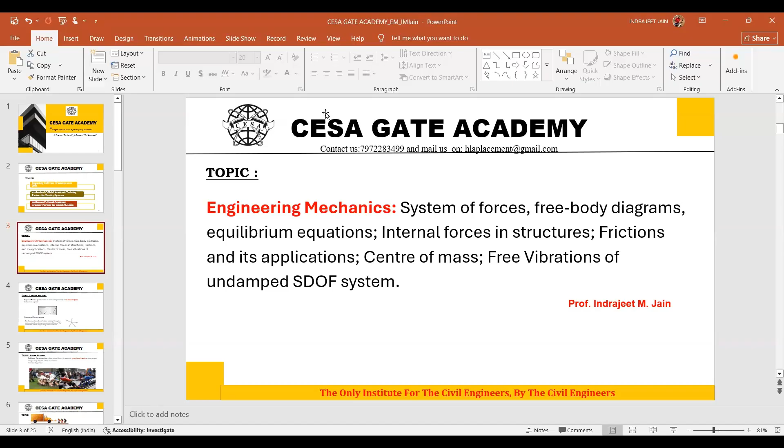This is the syllabus designed by GATE. To achieve this, the engineering mechanics part carries very less marks, hardly 2 or 4 marks questions. But engineering mechanics is the base to all the subjects which come under the head of structures.

System of forces, as we learned in our first year engineering mechanics, force is an agent which changes the state of the body from rest to motion. In civil engineering, all forces we consider are acting on a rest body. When a single force acts on the body, we call it a force. When there is more than one force, then it is a system.

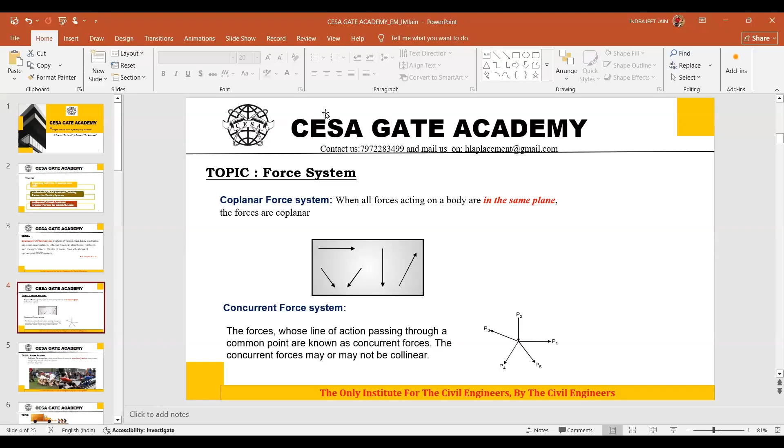There are different types of systems. On screen you can see the force system: coplanar force system, concurrent force system, collinear force system, parallel force system. The name itself indicates that when forces lie in the same plane, it's coplanar. Forces acting on the same point is concurrent, and forces acting in the same line of action is collinear force system.

These are the various force systems, and the effect of the force system on structures differs, and based on that we have to apply different formulas.

After that, we will learn equilibrium. Equilibrium is nothing but a set of forces which keeps the body at rest. As we have limited time, I'm not going to explain much more theory, since you already completed your graduation or are in the third year or final year of your engineering.

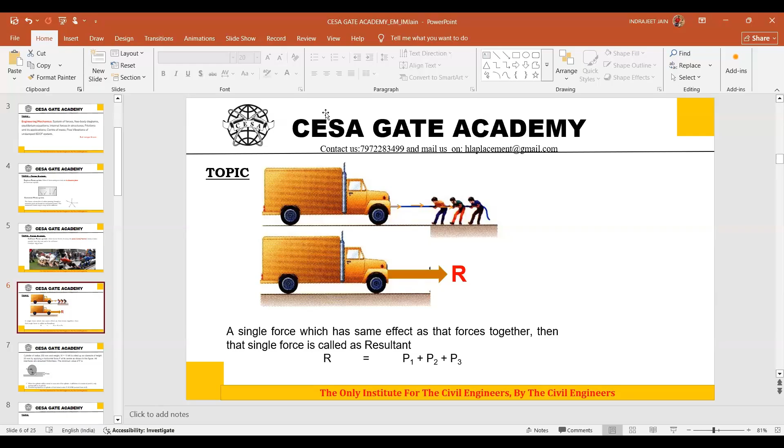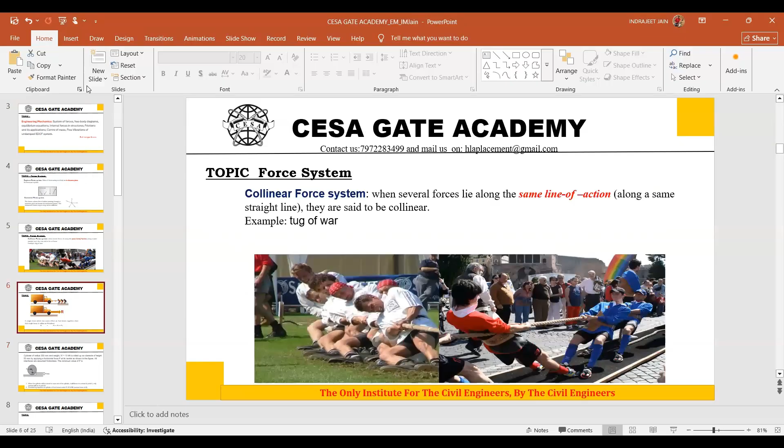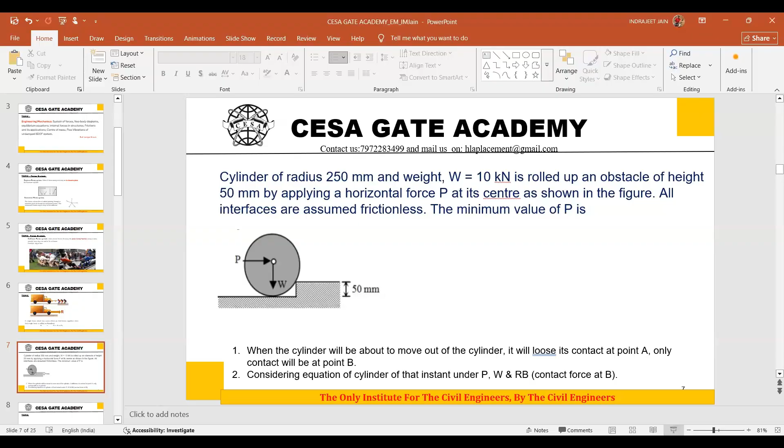Just a minute. Just a moment. Yeah.

In this particular figure, you can see there is a weight. Just look at this figure: there is a cylinder having weight W, and this cylinder we have to raise over this step whose height is 50 mm.

The cylinder radius is given as 250 mm. The weight of the block is given as 10 kilonewton, and the height of this step is given as 50 mm. The force given is a horizontal force P.

So everything is given over here, and this cylinder will move on this particular corner of the step. Like this, the contact between this floor and the cylinder will be reduced.

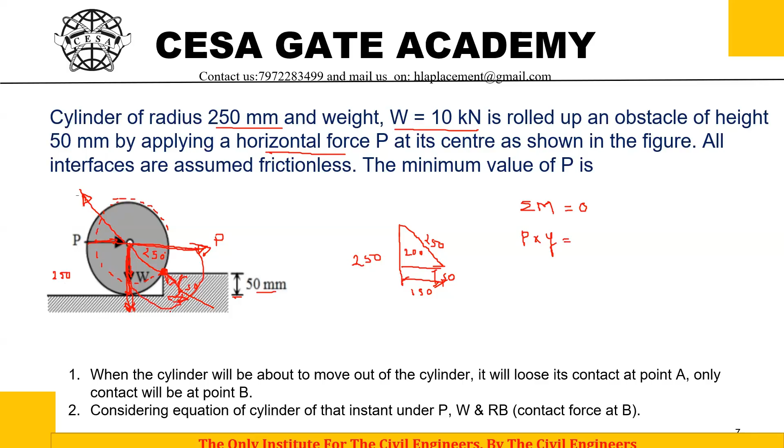If you take the moment of these two forces about that corner equal to 0, so P into the vertical distance Y, which will be clockwise, and this force will be anti-clockwise, W into horizontal distance X.

Now see here, P you have to calculate. Y value is known to us, that is P into Y. So P is the horizontal force and vertical distance is now 200 mm. This distance is vertical, this is 200 mm, and weight is given in your numerical, that is 10.

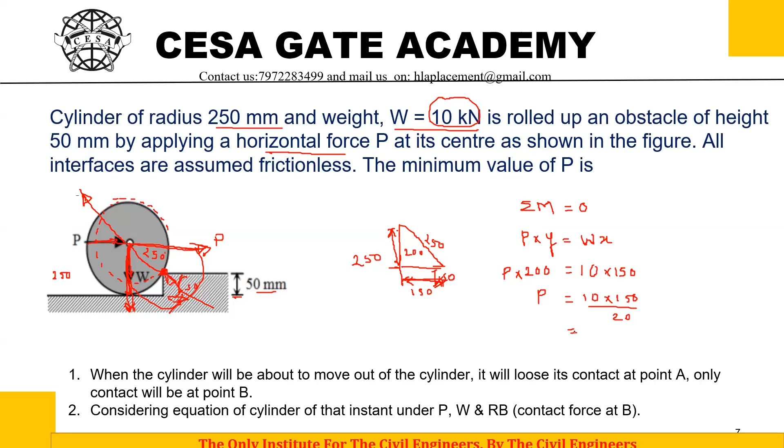And the value of X by Pythagoras theorem will get 150. I'm not going to solve the Pythagoras theorem here because it's just an introductory lecture, but by Pythagoras theorem you will get that, and from this you will get the value of P. It's very simple to solve such a numerical. Like this, it's 3 by 4, that is 10 into 150 upon 200, you will get the answer. Like this we have to solve the numerical. So in a very simple, short and conceptual way to solve the numerical, there is no need to go for the rigorous method.

So this basic concept must be known to us: hinge support has two reactions, that is horizontal and vertical. And roller has one reaction, that is always perpendicular to the support, one reaction.

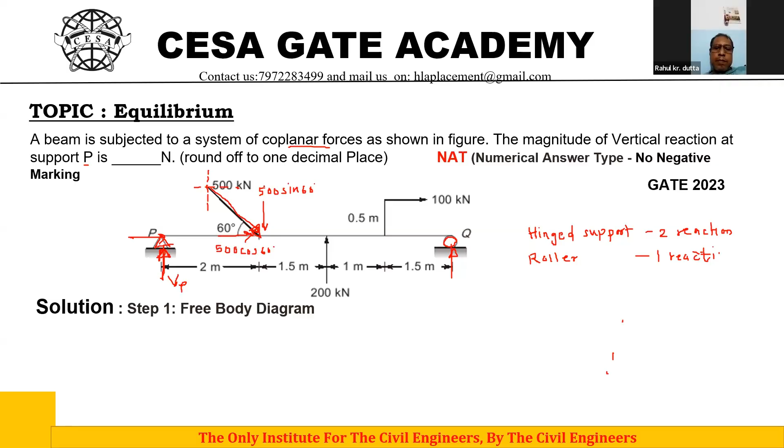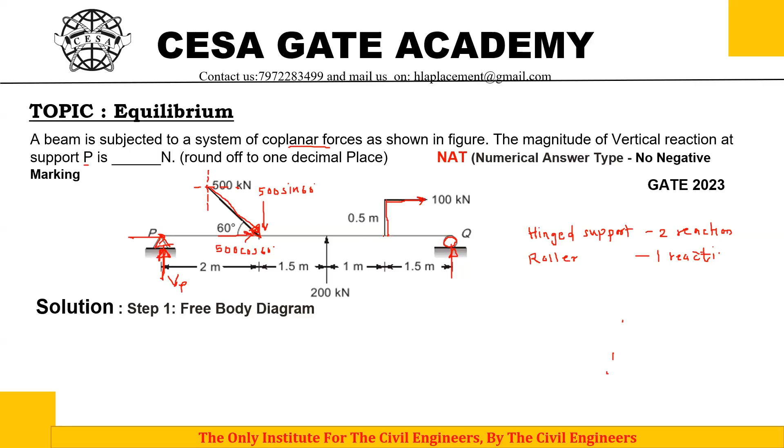Then after this, see here there is a force on a bracket. This is a bracket, and on which there is a horizontal force. So the equivalent of this horizontal force will be, we have to apply the same force here, that is 100 kN, and also produce a couple. So here this force is converted. Meaning if I draw here the bracket with horizontal force, this will be equivalent to the horizontal force and a couple acting at that point, and the couple will depend on the horizontal force and its perpendicular distance.

So in the next figure, I had drawn the FBD. You can see the FBD. Here there is a horizontal force, that is 500 cos 60.

Then the couple is converted, that bracket force is converted into horizontal force, and a moment is 100 into 0.5. That's it, this much only the conversion in this particular numerical.

And then we apply the condition of equilibrium. There are three conditions of equilibrium: summation of fx is equal to 0, summation of fy is equal to 0, and summation of moment is equal to 0. So as we want to find out this particular reaction in our GATE examination numerical.

So what we will do, we will take moment on this support, so in a single step we'll get the answer. We are taking the summation of moment. This moment is 50 Newton meter, that we have taken directly without multiplying a distance. This is summation of moment, so clockwise is positive, so I have taken positive.

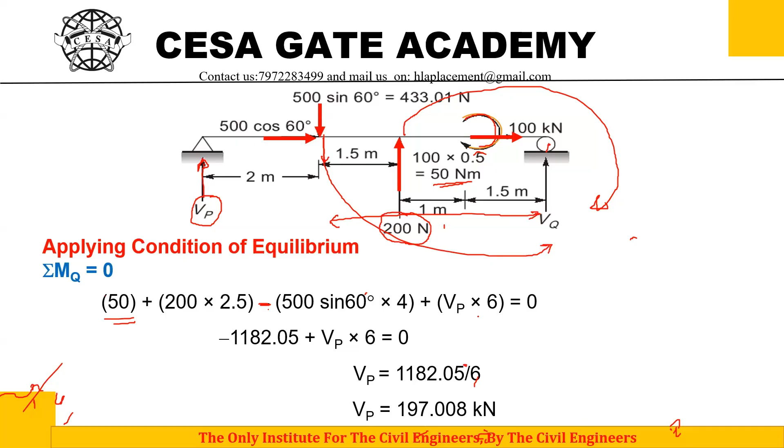And the distance with respect to Q is 4. Then after that, this next and last force Vp, which produces a clockwise moment with respect to Q. So Vp into 6. Solving this, we'll get the answer that is 197.

And if you go through the numerical, you can see that it's a numerical answer type question, no negative marking for such a question, and your answer is rounded up to 1 decimal place. This is a numerical from GATE 2023.

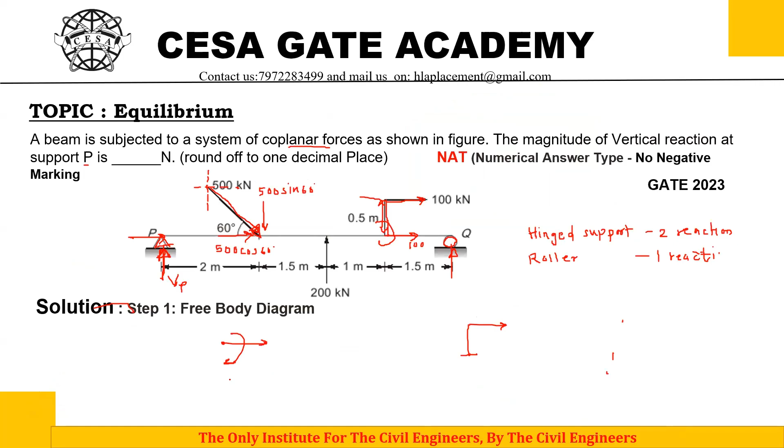So here we will not get any options, we have to solve this numerical and directly place the value. So here there is no option over there, you just have to enter this value, 197.0. Clear? So this is another type of the numerical.

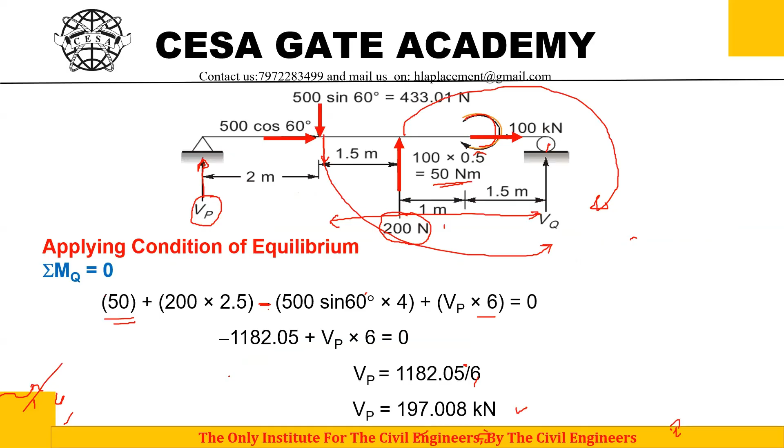So here the moment at the hinge is 0. So here there is a hinge and we'll break our beam into 2 parts and we take the moment about this one. So taking moment about the hinge, we consider the right part of this one, where the reaction RY is the vertical reaction.

Here is the fixed support having 3 reactions: horizontal reaction, vertical reaction, and a moment. But since there are no inclined forces or inclined support over there, the horizontal force will be 0. So only vertical reaction and a moment at the cantilever, that is the fixed support.

And at the roller support, there is only one reaction. So when we take the moment of these forces, RY into its perpendicular distance - this is your RY. RY into its perpendicular distance from the hinge is 2 meters, so this is your RY into 2.

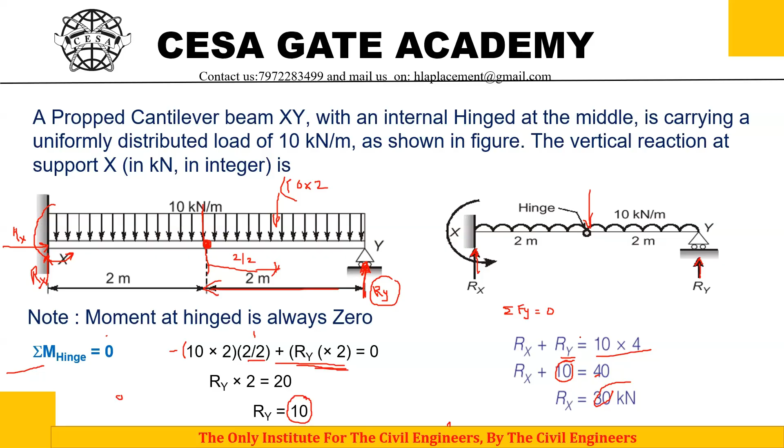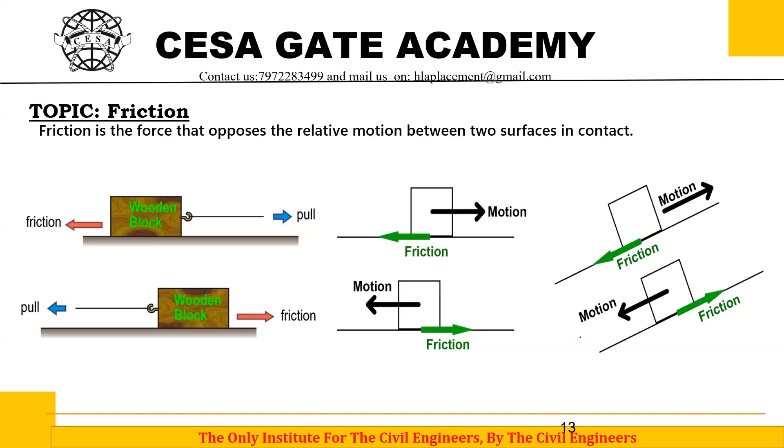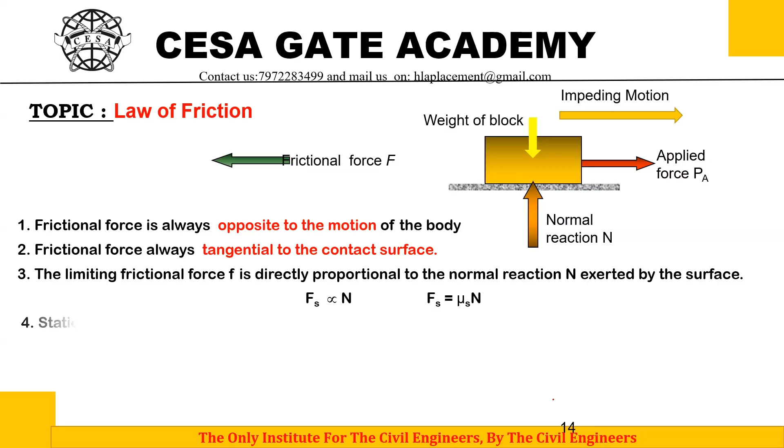Now, some laws of friction. First, as already explained, frictional force is always opposite to the motion of the body. Frictional force is always tangential to the contact surface. Limiting friction force is directly proportional to normal reaction, which is very useful for solving numericals on friction. Frictional force equals mu into N, where mu is the coefficient of friction. The coefficient of static friction is always greater than dynamic friction.

This is a numerical that was asked in the GATE examination, based on the friction concept. A horizontal force of P kilonewton is applied to a homogeneous body of weight 25 kilonewton, as shown in the figure. The coefficient of friction between the body and the floor is 0.3. Which of the following statements is correct?

In this exam, it's not necessary that there is always a single correct answer—MSQ means multiple answers could be correct. So let's select the multiple correct answers here. Let us see whether in this statement there is a single correct answer, two, three, or all four correct, by solving this numerical.

The horizontal force is applied at the top corner of this rectangular object, whose width is 1 meter and height is 2 meter.

The answer options are given: the motion of the body will occur by overturning; sliding of the body will never occur; no motion occurs for P less than 6 kilonewton; and the motion of the body will occur by sliding only. These are the four options.

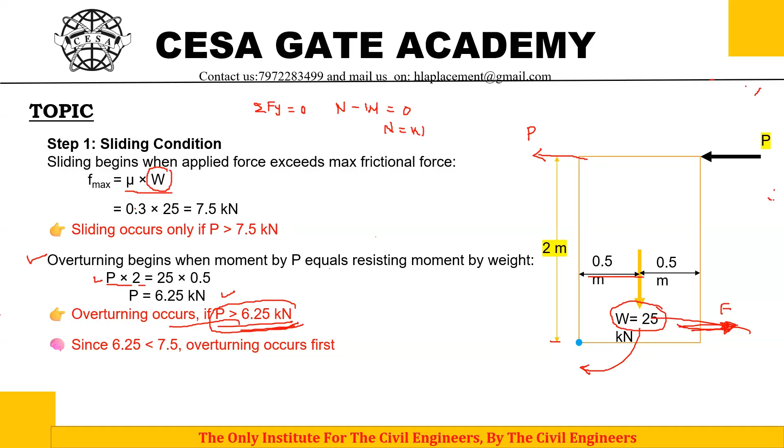From this we get the sliding force. Sliding will occur only when P is greater than 7.5 kilonewton. So which occurs earlier, sliding or overturning? Sliding occurs when force is greater than 7.5, whereas overturning occurs when force is greater than 6.25. So overturning occurs first, then sliding.

So looking at the options given: option A says the motion of the body will occur by overturning. Definitely the motion of the body will occur by overturning, because overturning occurs first. Sliding of the body will never occur.

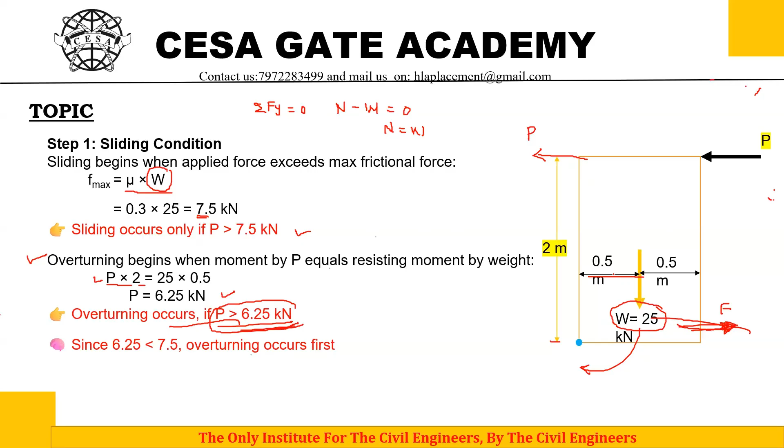No motion will occur if the value of P is less than 6.25 kilonewton. Why? Because our values are 6.25 for overturning and 7.5 for sliding. If P is less than that, no motion will occur and the system will be in equilibrium.

The last option says the motion of the body will occur by sliding only. This is incorrect because sliding will occur at the end, after overturning. So in this particular numerical, sliding will not occur. The correct options are A, B, C.

So we have seen the NAT numerical, the simple numerical, and the multiple choice question numerical. We have seen this particular numerical where three answers are correct. We have to deal with this properly and conceptually while attempting numericals in your GATE examination.

Never try to solve all the questions. Solve only those questions on which you have confidence. And that's why you require perfection in your subject.

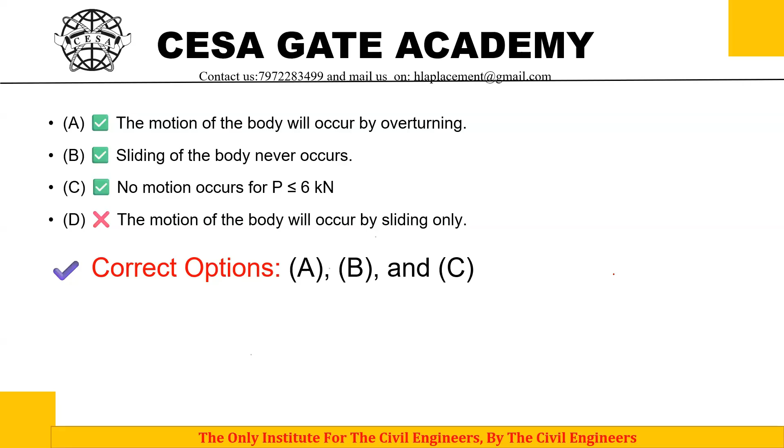There are some more topics, but I think other faculties are also waiting for their turn to present. I think we'll stop here and the further topic will be continued by the other faculties. Is it okay, sir, or shall I go ahead with moment of inertia? I think it is okay.

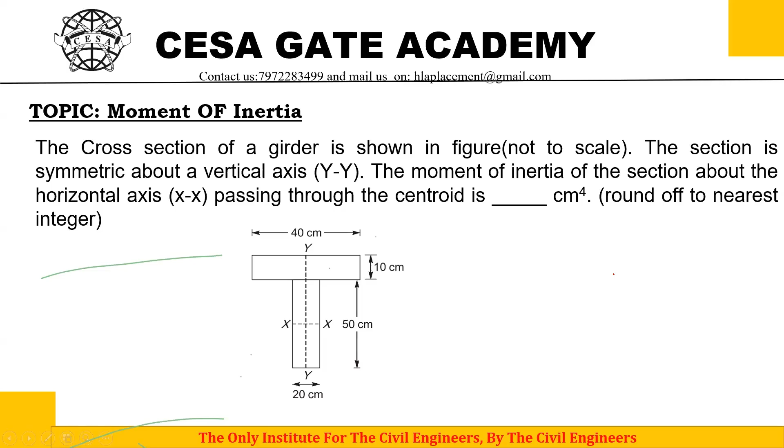Hello. Shall I continue or let the other faculty get the chance to explain this other topic? Yes, Tapkir sir, Pradeep Tapkir sir, would you like to take it ahead, or should sir stop the session? No, let me go with my briefing. Okay sir, thank you so much for the insight, sir.